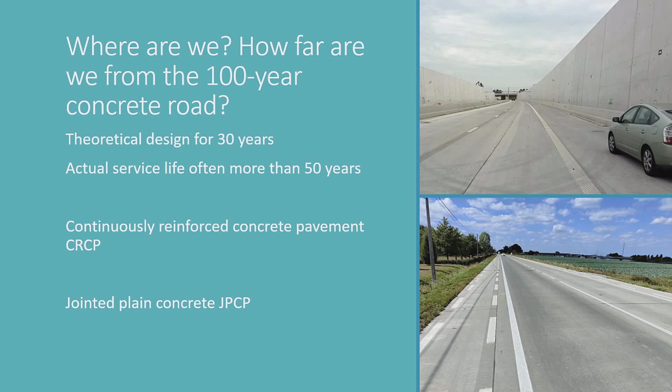Let me show you one of the nice roads we have near Ypres in Flanders. It's nice - the old one still has the date imprinted. They don't do that anymore, but then normally you can find it. This one was built in May 1938, one of the examples where it probably will reach 100 years, but it's not old enough yet to get there.

As you can see, these are old plates, very long plates - we don't do that anymore. We make them shorter because with a lot of traffic, you will see that they break, so the length of your slab is important. They didn't have dowels, they didn't have tie bars, but they're still in very good condition. Maintenance is excellent - all the joints are filled, so there's no water infiltration, which means you don't have a pumping effect, so you increase your lifetime for sure.

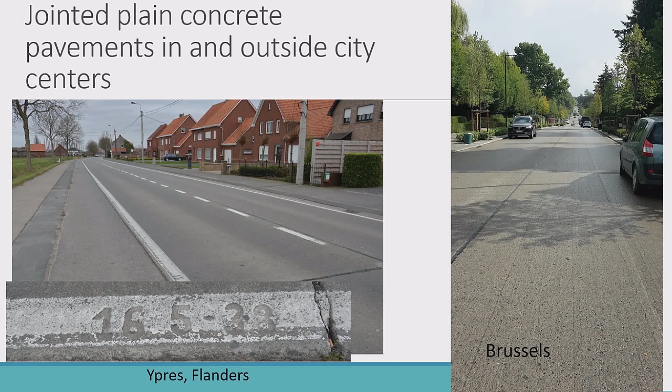The other example is taken from Brussels, in a really living center of Brussels, with a lot of houses, not that much heavy traffic. As you can see, some grinding has been done because there was some faulting, some step formation, and with the grinding they leveled that out, getting good evenness and increased comfort a lot. The noise is reduced, although they're not driving very fast there so there's very little rolling noise, but the comfort from removing the faulting is very high in that case.

And it's put on a very good sub-base layer. In this case, it was stabilized sand, which is still in very good condition. It's 50 years old. It was covered in 2007 after 35 years in service because it became too loud, so it was purely comfort related. So the structure is still very good. You have 10% heavy traffic, and over 1 million trucks passing that highway each year.

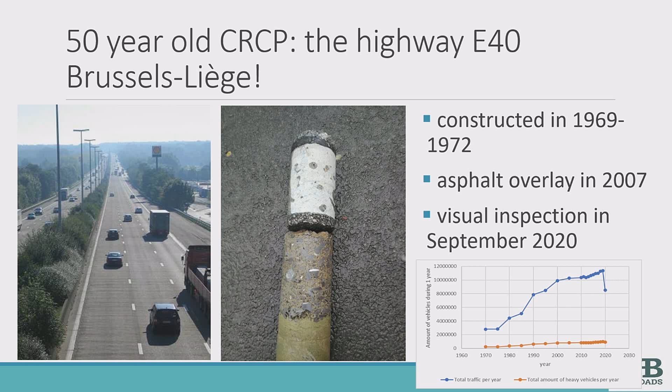Just to be sure everybody knows what CRCP is - continuous reinforced concrete - that's what we're using for our highways. It has the big advantage that it doesn't have transverse joints, or very few. So you get rid of all the maintenance of transverse joints, and all the faulting which can appear, the thump you hear on highways. Even when you construct it very well, in Germany they have a lot of examples of jointed concrete pavement on a highway, and you still hear the faulting after some years. With CRCP, it's not the case.

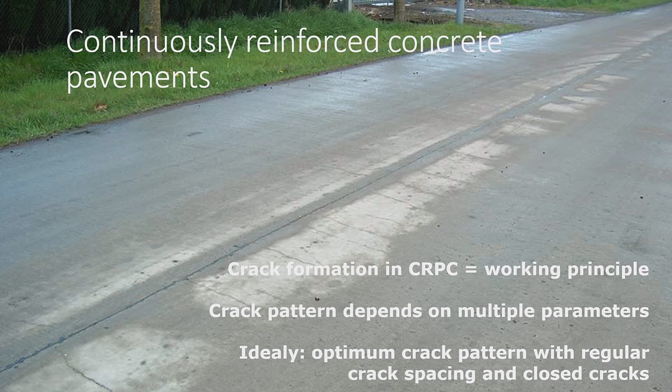You need cracks, but the crack pattern should be as homogeneous as possible, and your cracks are closed. The closing of your cracks is made by the reinforcement you put in, longitudinal reinforcement, which is continuous. The structural bearing capacity comes from the thickness of your concrete, similar to a jointed concrete pavement, a slab concrete. Just for information, the structure we used in the 70s.

Important here is the asphalt interlayer, because it protects your base layer from erosion, and it gives an adherence between the pavement and the base layer, which will be lost over time, but which will give you extra structural reinforcement, let's say, so you can have a longer service life due to the presence of that asphalt interlayer.

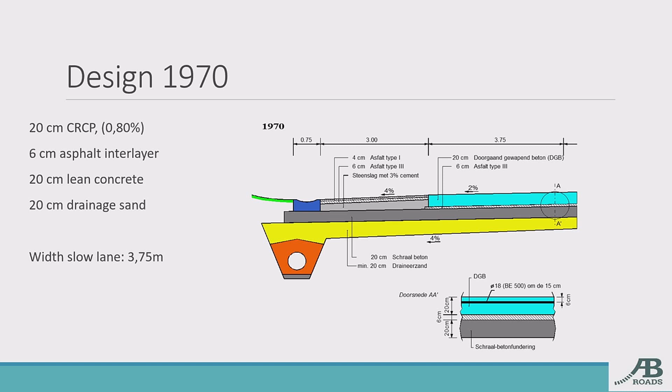Also, the width of the lanes is important because you want to avoid trucks driving over your longitudinal joint, as that is the weak point in your CRCP.

You design a concrete pavement by stresses, and the stresses are at the bottom of your concrete pavement and the bottom of your base layer. The base layer is the weak point here. So if you can increase the durability or longevity of your base layer, you will also increase the lifetime of the total structure.

So a good design is really important, and the design should incorporate the base layer - the whole structure should be looked at. Also, the quality of that base layer is really important, and for that you need to design it well and specify the materials very well. The stiffer your base layer is, the less stresses will be in your pavement, and the longer your total structure will survive. By using CRCP, you're also increasing the load transfer at your cracks, or at your joints if there's a structural joint, by adding that longitudinal reinforcement.

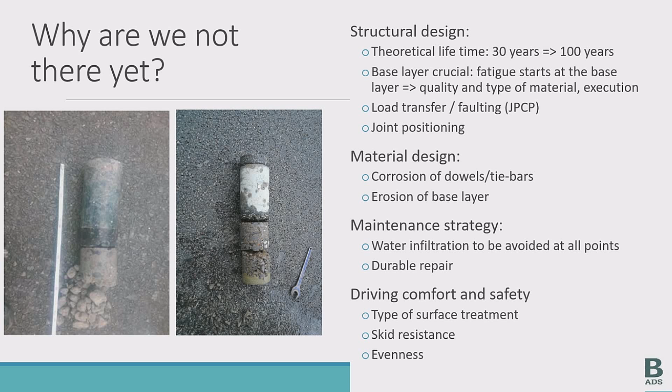Also, driving comfort and safety need to be taken into account because you can have some loss of skid resistance, for example. We use high quality aggregates, so we don't see any reduction in skid resistance. But if you go to the 100 year target, you could think of an asphalt overlay to increase the comfort and skid resistance again, or you could think of grinding, as you will see and hear later today.

Also, the influence of thickness is important. The higher you go, the more you will be able to withstand, with a certain maximum, of course. At a certain point, it will not help to increase the thickness anymore. So if we want more axles, if we want to reach that higher lifetime, you will need a thicker pavement, but you will also need some reinforcement in it, CRCP or dowels in your jointed plain concrete. That will increase the lifetime quite a lot as well.

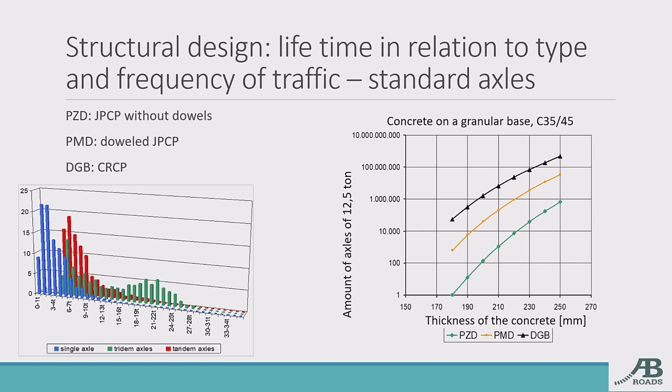Why do I speak about heavy traffic? That's just what I want to mention here. Know that the design theory started in the States, so the impact of each axle was tested there. They had 3 different types of vehicles which they tested, and they put them on a track with different types of pavements, just drove over them, and saw the impact of each axle on the durability of the pavement. From that, there was a fatigue law, which you see here.

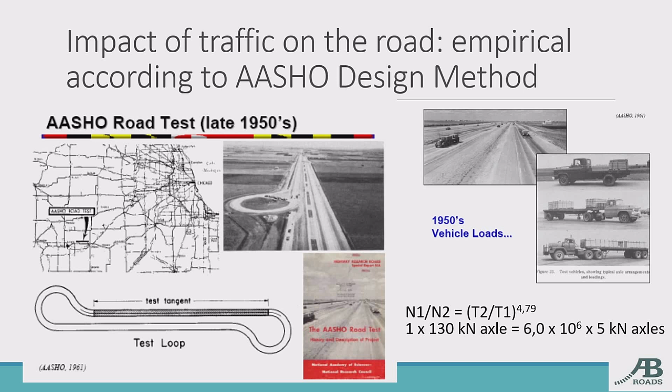What does that mean? It means that one axle of a truck, I'll just translate for the ones in the back, so 1 times a 13-ton axle, the impact of that axle is equal to 6 million cars. Which means, of course, that cars you can forget. You need cars to design the amount of lanes you need on your pavement, but for the structural design, you need your heavy traffic. That's the only one you really need. If you know that, it's okay.

Look then at the material design. I think corrosion is one of the main factors we need to get rid of when we want to reach the 100 years. You can do that with better maintenance, keeping the water out so your corrosion will be less. But you also need protection of your material. What we do now is protect the tie bars in the middle. We put an epoxy coating, which lasts much longer, and we will avoid the corrosion.

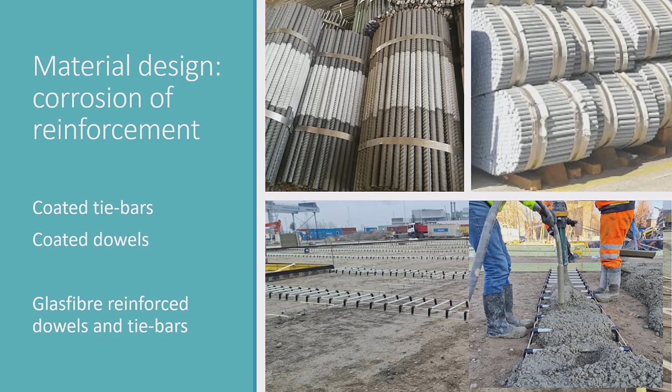We put on dowels, we coat them completely, just because there the widening is higher and the risk is higher to get corroded. Other solutions could be glass fiber reinforced rebars and dowels. We did some calculations now. There is a little loss in transfer possible. For the local roads, it doesn't have any influence. For highways, you have to look at it. But it's possible with almost the same layout to have them in your concrete, and of course they will not corrode over time. So I think a very good way to do it. They're also better for placement, much lighter, so it's easier placement. And we had test sections with them and got good results in execution, so a nice material.

Erodibility is also important. We see that if you increase the amount of cement, that's not something which came from me, but you see that the increase of cement will decrease the erodibility of your base layer. And that's important because this is...

Pictures taken from the A17, between Bruges and Kortrijk, nice cities. You should visit them too. They have good chocolate there, so...

In that pavement, you see the longitudinal joint here. We took a core away from that joint, to the right, and you see there's no erosion. If you don't have traffic on it, like on the emergency lane, you don't get erosion. At the right side of the longitudinal joint, erosion is starting. At the left side, you see real degradation. The base layer is not intact anymore, and you get the start of punch out, the start of degradation.

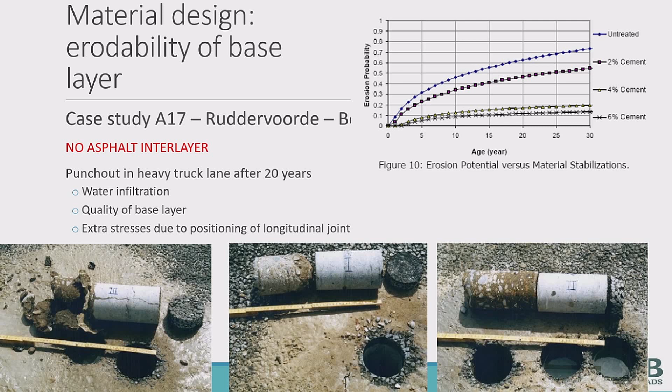Why is this a problem on this highway? They economized, they left out the asphalt interlayer, they left out the protection of the base layer, and they got erosion after 20 years, which is not the lifetime we want for CRCP. We want at least 40, 50 years. So a good design, keeping the layers you want, keeping that adhesion layer, is really important, and improving the durability of your base layer is also very important to get to 100 years.

I think with CRCP on our highways, we can reach 100 years if we increase the thickness and increase the reinforcement rate. You have a minimum at this moment of 0.75%. For those in structural engineering, this is not structural reinforcement, it's way too low. It's just reinforcement to keep the cracks closed.

It's placed at the top, or a bit higher than the middle of your pavement, just to be sure that the cracks are closed and that you will not have water infiltration. So increasing that could lead to longer lifetimes. Increasing the thickness for sure is needed. Quality of the base layer, presence of an asphalt interlayer, and positioning of the longitudinal joint, because if you're driving on that, your stresses are higher, pumping effects could be introduced, so you don't want that. In relation to that, we avoid all longitudinal joints between concrete and asphalt, so if you have an exit and an entrance, we also put that in concrete until they're separated, and then we go to asphalt.

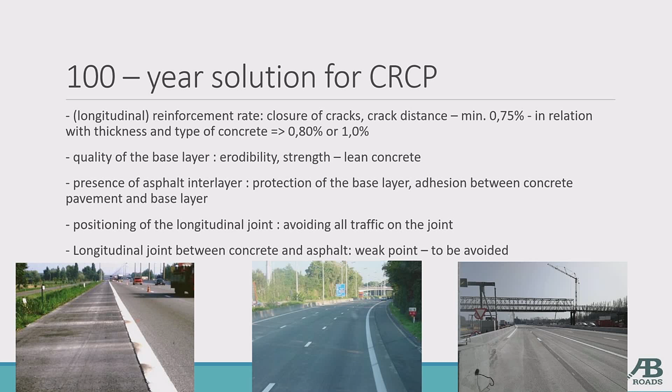With CRCP, you have one main problem, which is punch outs. The moment you lose your support by the base layer, you have a risk that small cracks form, and then you have a punch out. Here is a figure made by some students for me, based on the MEPDG program in the States. You see an increase in thickness, an increase in reinforcement rate, decreases the risk of punch out enormously. So respect the minima and go perhaps a bit further to be sure you have a long lifetime.

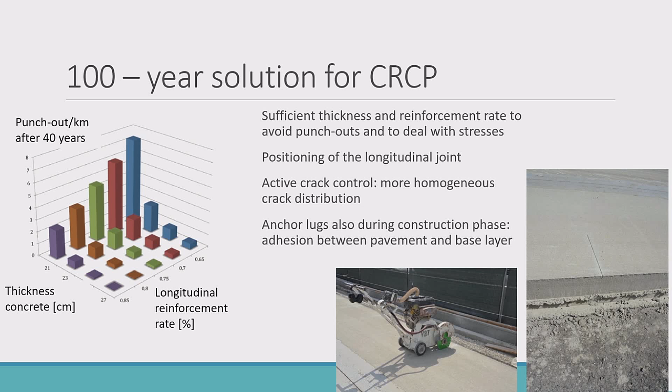We also introduced active crack control to have a more homogeneous crack pattern. I can inform you on that also if you want. It's really helping to increase the durability of CRCP.

Going back to the JPCP and telling you why corrosion is important, this is a nice example in West Flanders, constructed in 1958. In 2007, so 50 years in service, they started to have complaints about vibrations. People living at the site said it's getting really bad. They did some research and saw that all the dowels present at the time were corroded. So now you had a good concrete road, still very structural, very stable, but with faulting, step formation, and a lot of vibrations.

So what did we do here? We just put new dowels in. You can see them here, three dowels in the driving lane. They were put there in 2010 and they're still in very good condition. There's no faulting anymore, so it's still very, very good. It's not easy to do that, but if we could bring in dowels which last for 100 years, this road will definitely last for 100 years, especially as the thickness was larger. It was 30 centimeters because they had a lot of industrial traffic, so that will for sure last for a long time.

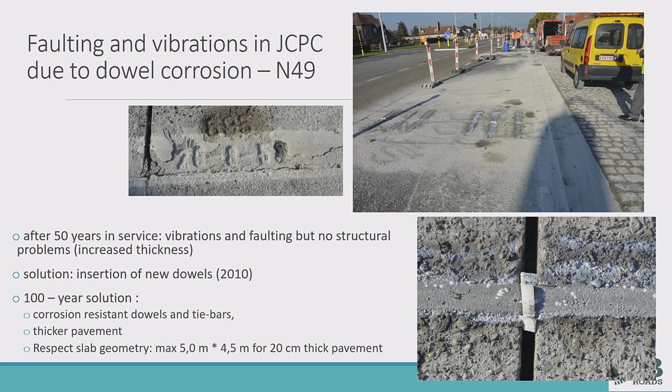I also talked about maintenance strategy. I think that is really important. Here again, when you see CRCP, you almost do not have maintenance. You will have some spots perhaps where you have to do something. You will need to maintain your longitudinal joints, but you don't have the transverse joints, so maintenance goes down very much.

What you also see is, if you don't have a replacement, if you can increase the durability of your pavement, for sure your interruption of traffic is much lower, and that will also have a positive influence on the social impact of your pavement.

I just finished, or the publication just came out. It's a publication for the German Steel Federation on the life cycle cost analysis of CRCP compared to others. If you are interested, I will transfer it to you, or you can have a look. I will also give it digitally to BritPave, with a link so you can view it through the website.

This is a really important table. I made it unreadable here, but you can read it in the publication. It shows what impact you expect from the types of pavement - what maintenance will you have to do, and at what frequency. Of course, if you can decrease that frequency, the better it is for the customer, for the user.

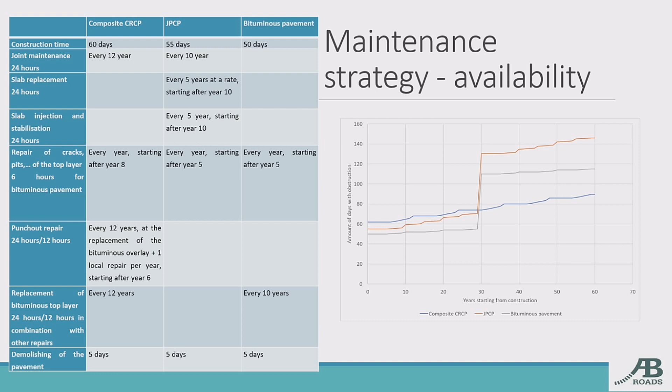Surface characteristics are also important. In Belgium, we did a lot of research on low noise concrete pavements. We saw, and still see, because at the moment they are built, that the two-layered concrete pavement with the exposed aggregate surface at the top is performing very well. We get noise reductions comparable and better than a new SMA C, a 0 to 10 millimeter stone mastic asphalt overlay or top layer, which is the reference for noise in Belgium.

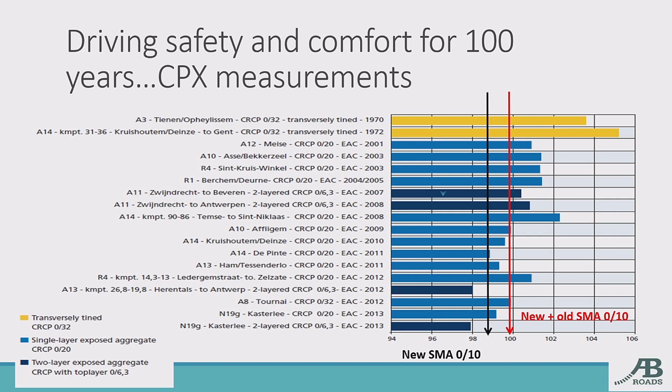So we see that with a two-layered CRCP, we're getting there. Even with the one-layered CRCP, we're also getting there because there's very good evenness, which is also influencing the noise production of a surface.

For the old roads, we applied next-generation concrete surface. I won't go into detail - that will be explained later today. Just know that we had a test section some 10 years ago, or maybe 7 years ago, 100 meters. There we defined our specifications.

We had different types. One came out very good, where we got reductions at the beginning of -6, but then constantly -4, 4.5 decibels. We applied this also on the ring road in Antwerp, where you have a lot of traffic, last year, and there too it's performing very well.

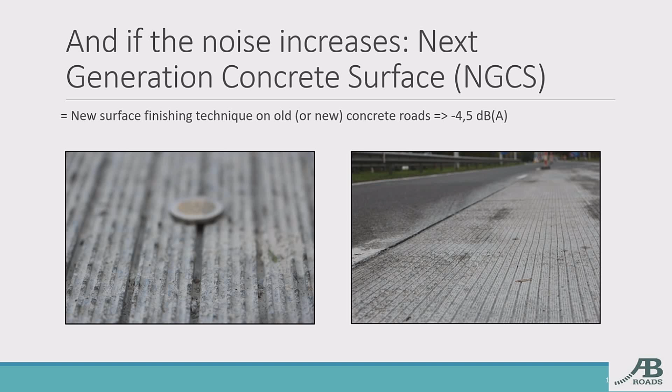You see really the noise reduction, which is really very important. -3 decibels means half the noise - it's logarithmic. So -4.5 is a very important noise reduction.

I have no idea on timing, but I want to... Okay, thank you. I just want to end by showing you some projects we're doing now in Belgium, or did some years ago, on highways where we're using concrete pavements because we think they're very good in durability, low in maintenance, and have some advantages toward other types of pavements for some typical applications.

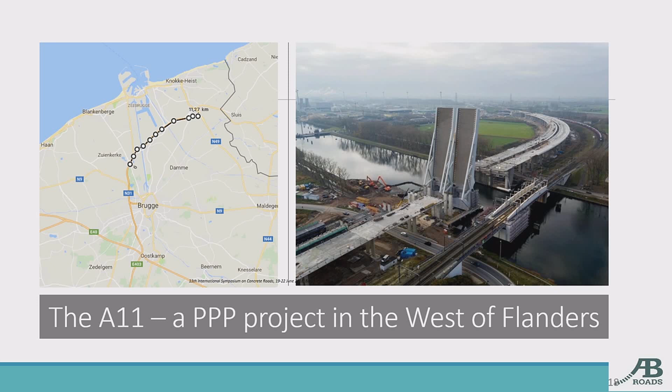One example is the A11. It's a PPP project, a public-private project, where they made a choice especially for the parts which were in tunnels and open trenches to use concrete there because of the advantages of low maintenance. So all tunnels and trenches are made with a double-layered concrete road.

It's really in the fields, but it's a natural zone, so they didn't want the noise production to be too high. So even in the open trenches and the tunnel, they put a two-layered CRCP.

This one is still just a picture, a wish of how it would look. I can assure you it looks the same - I didn't have the same viewpoint so I couldn't take the exact picture, but it looks really the same when you drive on it. This is during construction.

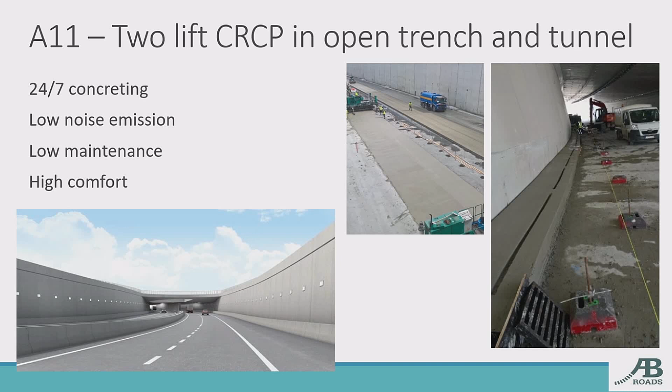As you can see, the tunnel didn't mean any problems for construction. You need to take care, of course, that you don't hit the ceiling, but it's really feasible to put CRCP in that tunnel.

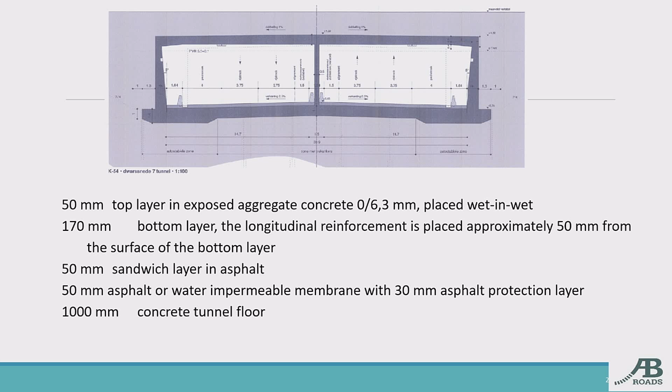The advantage of the tunnel, of course, is that you have a very good base - a concrete floor of 1 meter, so you cannot have better than that. So you can reduce the thickness of your CRCP a bit. You still use the 50 millimeter sandwich layer, and then you need a water impermeable membrane, which we use mainly to protect your concrete from water beneath. This is the execution - you see the two-lift pavement.

So we have two slip-form pavers, one after the other. Because it's CRCP, you have your longitudinal reinforcement, which is continuous, so you cannot make it in one width. You need to have two phases at least, because you cannot drive on it. But with that, you can bring your concrete to both places where you have to pour it.

You also see the space between both. We say it cannot be more than 30 minutes in between, which means more or less 30 meters. I'm sure if you go to 1 hour it shouldn't be a problem because you have some flexibility, but we aim for 30 minutes to be sure you have good intermingling. It's not adherence because it's not a straight line, they just mingle one with the other, fresh in fresh as you put them on.

The last one is the plastic sheet and the retarder, which is sprayed on to retard the surface, to have an exposed aggregate surface after it. So here you see the finishing. Then you brush away that cement slurry at the surface, which is not hardened. After 15, 16 hours it was done in this case.

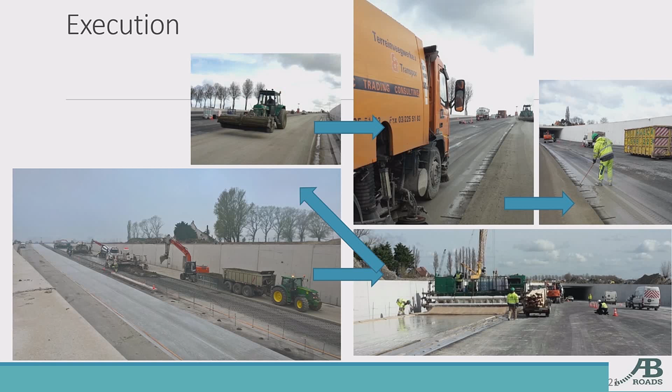What is really important here, why I show you this, is a PPP project. I've never seen it on another project, but they cleaned the asphalt because that asphalt interlayer needs to be bonded with your concrete, and that will ensure the bond, that you don't have any slurry on it. So they cleaned it with the machine and then by hand in between the rebars or the tie bars which are already present. Very nice execution, very nice site.

The other one I'm involved very closely. I'm working now for Lantis, which is the owner of the Oosterweel connection in Antwerp. It's a closure of the ring road around Antwerp.

There it's really a sustainable approach. There has been a lot of interference, I almost want to say, with the local people, with the people living there, with all people involved in a sustainable solution.

We had a bridge planned in 2006. Everything was signed for a bridge. And then there was so much interference from everybody, let's say, who was not Lantis at that time, that it changed to a tunnel. So now we're building a tunnel. Some 10 years later, or even more, it started.

One of the demands was concrete as much as possible. It's not always possible technically, and it can increase the cost of the tunnel, but in most places it will be concrete.

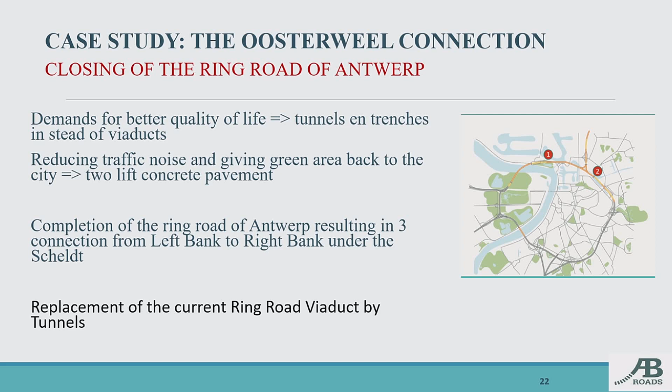Some pictures just to show how it will change the look of Antwerp. Everything will go underground. There is a new connection under the Scheldt, so a third tunnel under the Scheldt, which will increase mobility a lot.

The place which is gained by that will be rebuilt as a green area. So we will not only make the ring closed for traffic, but also for pedestrians and cyclists. Also there, the ring will be closed in a green area.

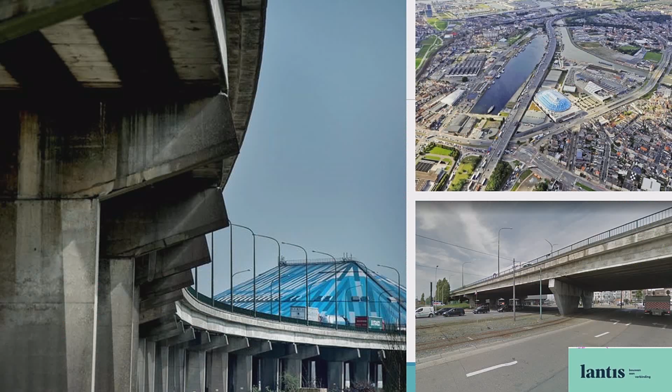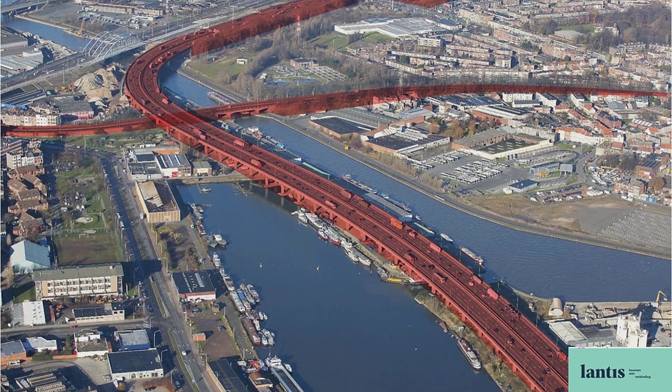This is how it is now at the Sportpaleis, which is a big event place. You have a viaduct, so it's really not a nice place. You see it there running. Lobroek Dock, which is a place you will recognize, is this one. So this viaduct and this bridge will be gone, and we will transform it into this.

So here you see the viaduct which used to be there. It goes two levels down, and then the other connection road will also be put into the ground, so you make a green ring above the ring for the traffic, the cars and vehicles.

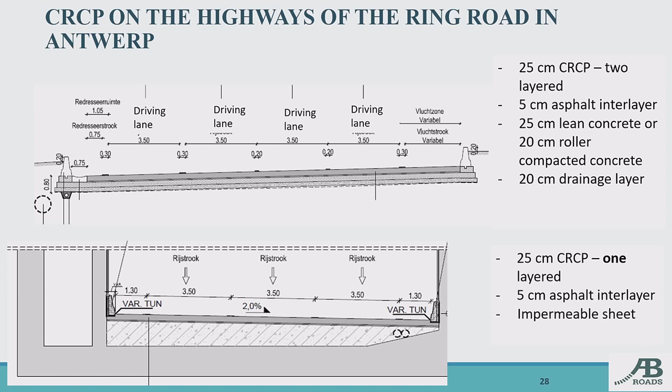So I'm involved there for the CRCP and the asphalt, the road specialist, let's say. But also there we want CRCP as much as possible for the low maintenance. We even put 25 centimeters in the tunnels, which makes it last longer.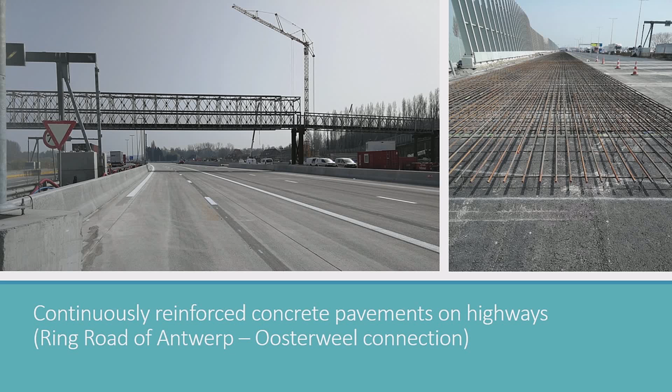Some pictures of the construction. So you see the CRCP here, the reinforcement starting. We do the complete width in concrete, so no emergency lanes in asphalt, because the longitudinal joint is always a problem and will give you problems over time. You also have diversions over the emergency lane, so we do really the total width in concrete.

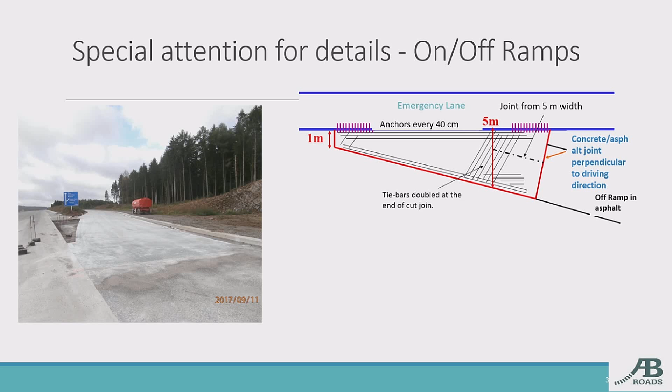We look at the details, because that's also really important, I think. For example, the entrances and exits. We make sure there's no longitudinal joint between asphalt and concrete, especially where vehicles drive over it—that's not wanted. So we do everything in concrete, and there we make the transfer to asphalt, because the ramps are mostly made in asphalt.

Even there, sometimes we do some machine placement, and then we cut parts away to be sure it's good quality. So it's an exercise done in this case for the left bank, which will also be done for the right bank. It's a complete interchange, full exposure from the contractor to the owner in this case. The phasing needs to be adapted, but it's worth it for the end result.

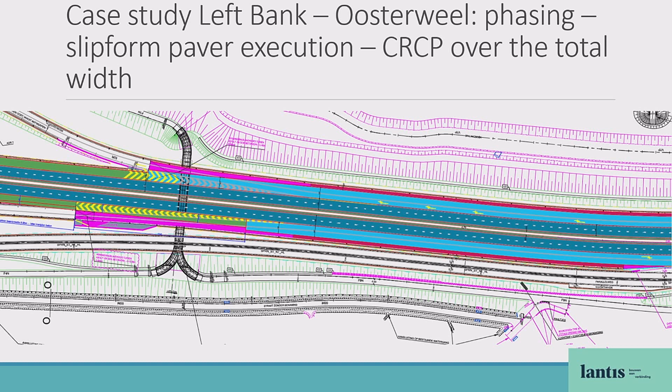It gets good quality.

I cannot leave roundabouts out—for England, I have to mention them. There also we have very nice solutions with slabs, but also with CRCP. Roundabouts are especially tricky if they are in industrial zones; they need large curves, so they're ideal for CRCP. In this case, your CRCP is really connected throughout, so you don't need any anchor lugs at the end.

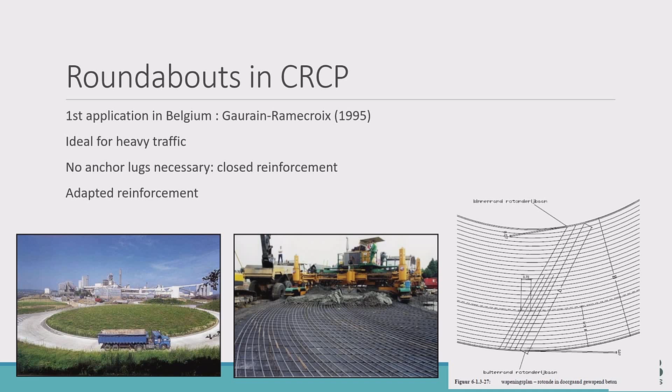It has a bit of adapted reinforcement. The reinforcement rate is a bit higher when you calculate it, but we have very good schemes for how to do it, and we even used it here.

I love the name, dog bone roundabout. It doesn't seem like two roundabouts in CRCP, but I can assure you, here we put two roundabouts in CRCP, connected throughout because of durability. It's the connection to the harbor, so really only heavy traffic. In that way, we're sure the durability of that roundabout will be there and maintenance will be very low.

Also, the entrances—I would have liked it a bit longer—but the entrances to the roundabout are made in concrete, so the exits are then almost directly in asphalt, but the entrances are also in concrete, just to be sure you don't have any rutting when heavy traffic is standing there.

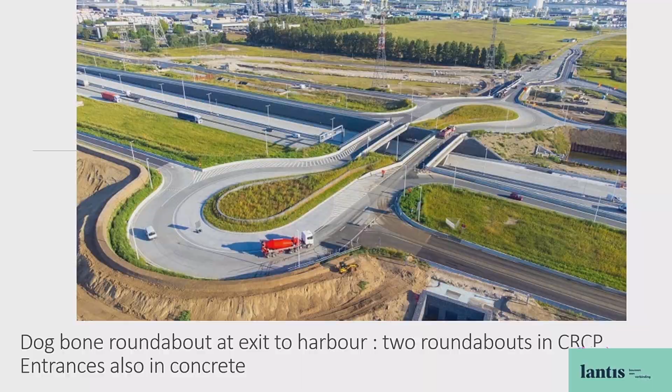So I think I can conclude we are almost there. It could be that we are there without knowing it, that these will just last for 100 years. But to be sure we reach that 100 years, we need to adapt the design a bit. It will cost a bit more at the beginning, but over the total lifetime, the cost will for sure be lower because your maintenance goes down and reconstruction will be much longer delayed before you need to reconstruct.

Material design is really important, avoiding that corrosion. Joint layout—I didn't talk about it, but it's also really a part which needs consideration at the design phase and needs to be reconsidered during placement, because the phasing also plays a role in that. Maintenance strategy is about having no water in the structure at any time.

And then, of course, you have the quality of materials and quality of execution. With concrete, it is possible to get a sustainable pavement because you have low maintenance, low interference, and low noise emission. It is possible. If you don't reach it, you can go to other overlays or next generation concrete surfaces to reduce it further.

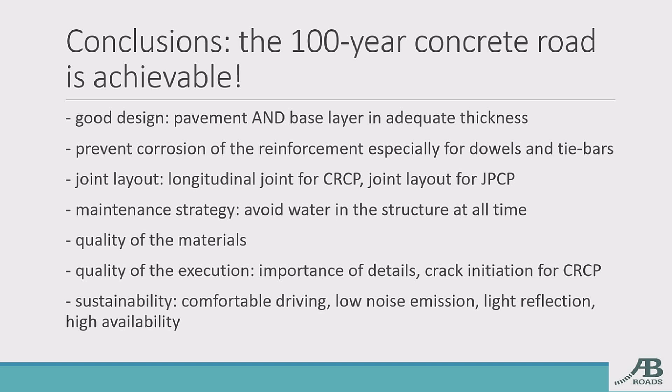I always thought this was kind of publicity talk, the light reflection, but we actually reduced the lighting in the tunnels in Oosterweel. The lighting engineers calculated it, and with the reflection of the concrete, it was possible to reduce the light capacity in the tunnels. And due to the low maintenance, we have high availability.